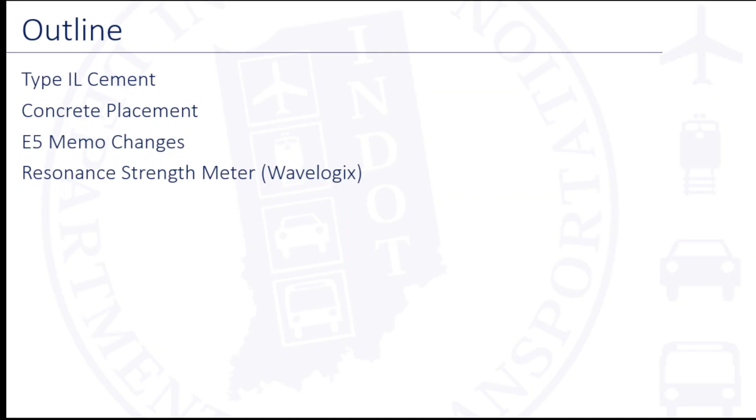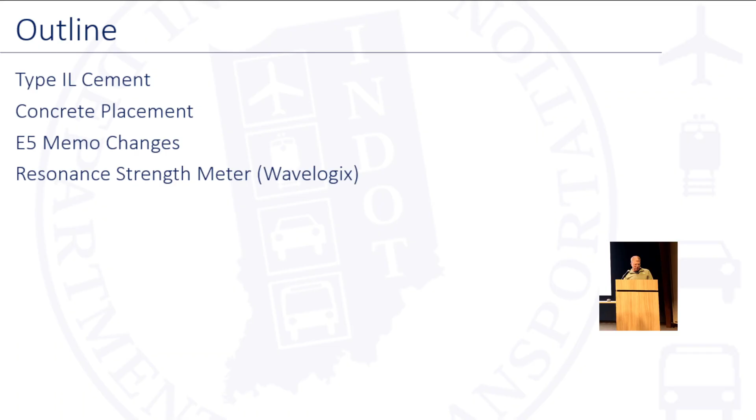Before I get started, I also want to mention that we do have some new folks in the office in my section at M&T. Those of you who don't know, Rick Harris was with us a long time. He passed away late '24. And we now have Elena Cruz, she handles a lot of the approved list items. Joe Romanek, he's handling the precast certified programs. And we have Brian Wathen, who was formerly the materials engineer in Seymour District. And then we have, I call him Doctor, he's not here, Dr. Abul Mazumder, who's handling a lot of the in-house research we're doing. I'm sure Rick is smiling somewhere and just laughing, saying it took 3 engineers to replace him. So if you know Rick, I think that's fair.

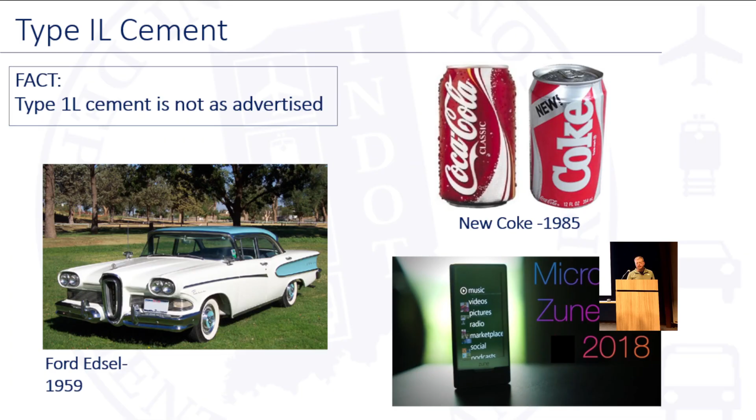So, 1L cement. I'm a customer at this point. Not really trying to be mean here, but this is kind of how I feel. There's been some marketing things in the past, some notorious ones, I guess. I was around for the Coke and the Zune. Don't really remember the Edsel, but you see where I'm going. The things are not as they were advertised, and I'm not particularly just being mean with this.

The reality is it's being said out loud: if things didn't work out, maybe the first thing you do is change the marketing. On the left, you can see what was being said in '21, and this isn't just me talking. They know that, say, perhaps it was a misstep. It was all type 1L cement was marketed as 1-to-1. It is not 1-to-1. That is being said out loud now. NRMCA in '21 was saying it was 1-to-1. Now there's very carefully qualified language saying not so fast.

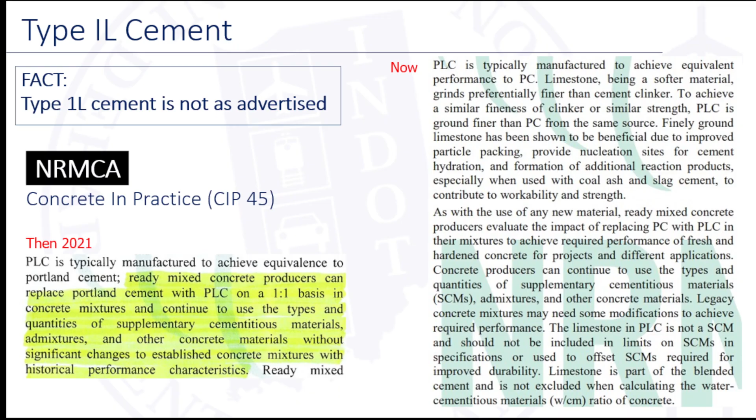Last year, ACI's Concrete International Magazine published an article stating that while early promotional materials touted PLC as a one-for-one replacement for OPC, field observations and subsequent work have indicated that the changeover is not that simple. For example, additional limestone in PLC can impact admixture effectiveness. These are things we've been chasing, asserting, and suspecting, and they're just reality.

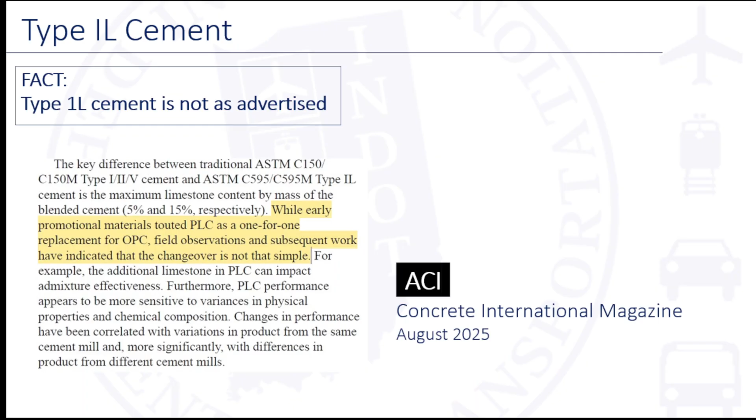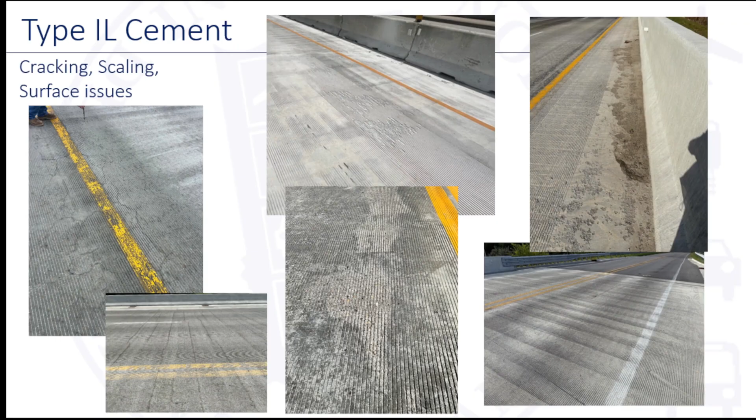And speaking of reality, this is our reality. It's happening, we're seeing issues, cracking, scaling. Maybe not every time, but we're out looking at these decks now. We've got bridge decks from around 2023-ish. There was a lot of change very quickly, and we're seeing bridge decks rated 5s and 6s, quite a few of them, in decks that are only a couple years old. There's at least one 4 I'm aware of, and that's just not acceptable.

Now when this 1L came along, we also started machine grooving decks. Those two things kind of happened at the same time. The bottom left and bottom right pictures probably have more to do with the transition to grooving, in that grooving doesn't hide anything. When we tined decks in the past, there was perhaps some forgiveness in the texturing. But when you groove it, it's got to be about tabletop level to get even grooves, and when the pans go back and forth, you inevitably get ridges.

And in the bottom right, when the snowplows go over, they clip those ridges off. So there's some things out there being called scaling that are really, I would say, scraping, which is a different phenomenon, and that's part of this. When everybody's looking at decks, there's a lot of different phenomena in play, and it's a little hard to sort out everything that's going on.

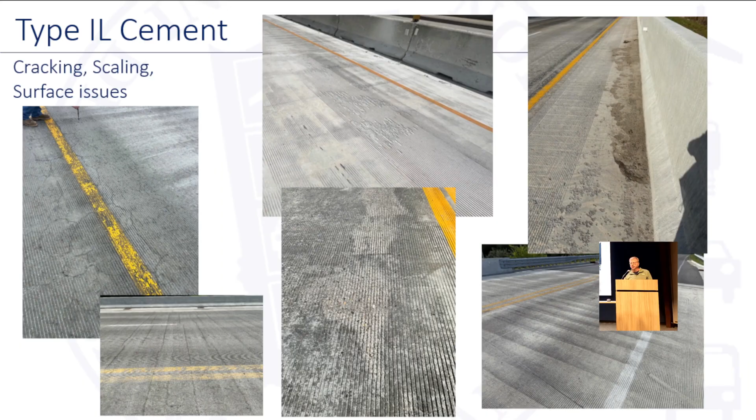Well, too much. So one thing that's going on, and it's taken a little time to sort this out, is the idea that admixture incompatibilities are happening. Some people take offense at the term, honestly. To me, incompatibility simply means it's not doing what I expected it to do. That's my version of it. Maybe the chemists have a different version.

But it's a fact that admixtures always needed to be more customized to the cements they're being used with. The chemical companies would rather sell one-size-fits-all in a region. So the admixtures, especially the water reducing admixtures, were perhaps in recent history never dialed in the way they should have been, but they were good enough. There was a lot of experience with them, people knew how to use them, and made it work.

There was a lot of change very quickly when the chemistries of 1Ls changed. The reality is there wasn't a lot of communication between the admixture companies and the cement manufacturers. So things happened, we've seen a lot happen, but now we're finally seeing it under the microscope. What you're looking at there is what we're calling air clustering.

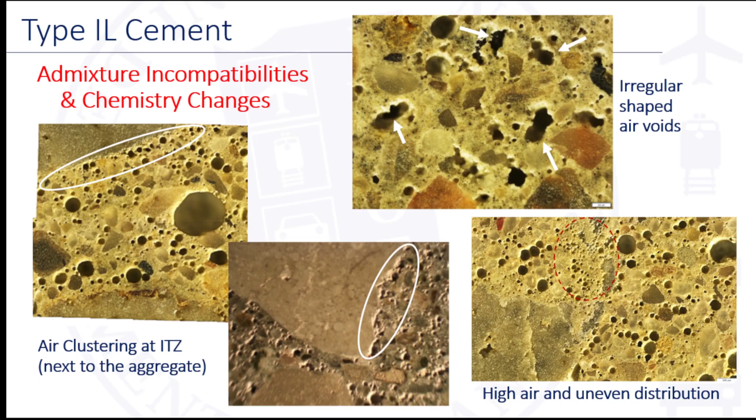We've seen hardened air content that's actually higher, which is unusual, meaning some of this air is being gained, maybe after it's tested. But there's air gain, and then the top one is even more interesting: those air voids should be spherical, but more and more with the 1L cements, they're seeing irregularly shaped air voids. The hypothesis is these are not single air voids. What's happening is multiple spherical bubbles are conglomerating together, so one irregular void might be 4, 5, 10 smaller bubbles jammed together, and that shouldn't be happening.

So the bottom line is, if folks are still seeing low strengths or slow strengths, let us know. We still need to gather data to figure out more about what's actually happening. And as always, include the mix design if you've got it.

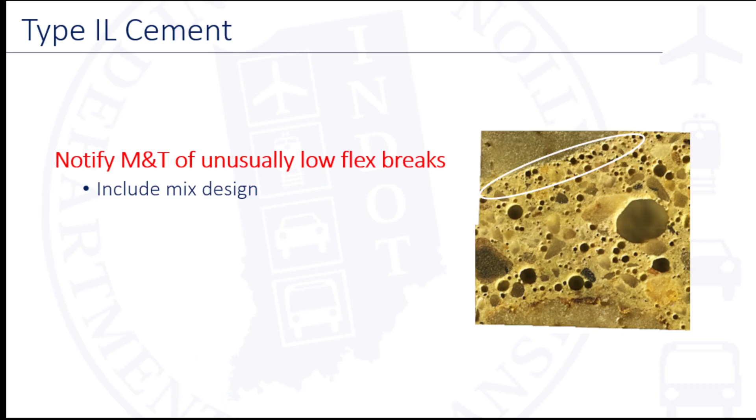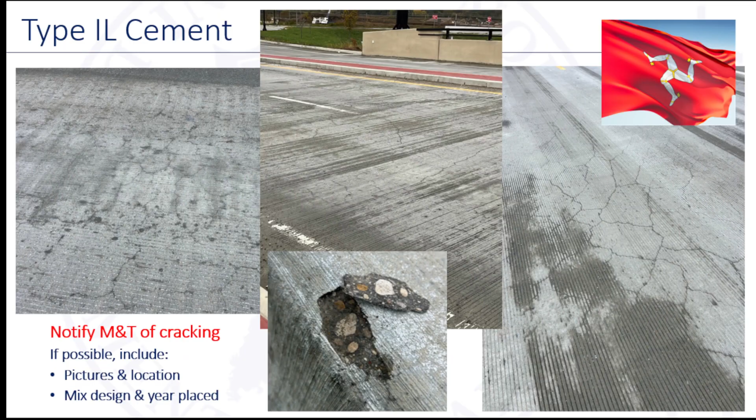That's not normal. So the ask is going to be: look at the decks. I will qualify here, a lot of what I'm talking about is bridge decks right now. We're seeing less of this in pavements at this point, but I think there's a lot of variables at play.

So anyway, these are some of the things we're seeing, and it's certainly not what we want to see. If you're seeing these things as you go out and look at decks, if you looked at them last year and thought maybe you'd see something, please go out and look again. We are trying to do our best to go out and look, but send pictures that represent the whole thing, and the mix design and years placed, all that information is good to have.

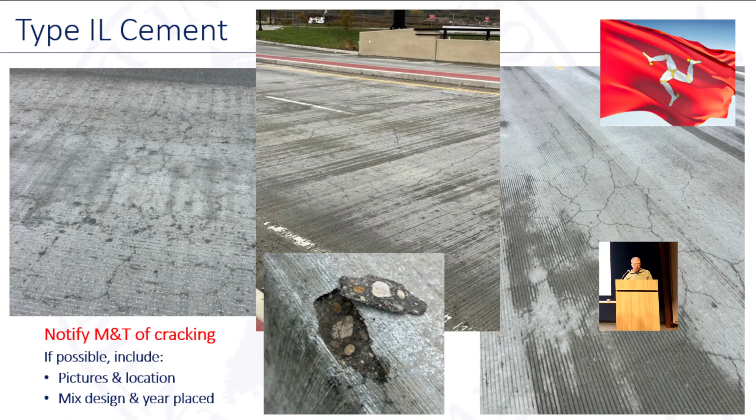So one thing we have done is Indiana, or INDOT, did cap the limestone percentage at 10%. ASTM allows 15%.

Look, the industry, they've said it themselves, I'm not picking on them, they're capitalists, it's more profitable to put more dust in there. So that's where they were headed. Some had kind of gravitated more back towards 10%, others were going higher, but we've capped it at 10%.

It was based on what we knew last year, and this really started happening early last year. Based on what we knew, it was a lever to pull. It's a step in the right direction. Is it going to solve everything? No, it is not. There are a lot of variables at play, a lot of chemistries, a lot of things with the manufacturing itself, but limiting the limestone dust is very likely going to help the problem.

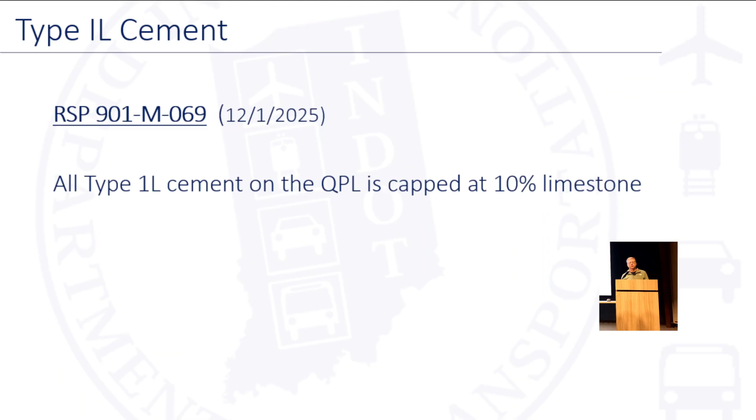So we are the only state in the country to have done that. It has not been without a bit of a challenge, we'll say, but that is in place. So any limestone cements, PLCs, you get off of our approved list as of now are going to be capped at 10%.

Concrete placement. I'm not picking on anybody here, and the intent is not to say no one got out of bed in my career and said I'm going to go do a bad job. I've grown up in this as well, and learned some things. The reality is 1L has highlighted some of the problems that are out there that we could have always been doing better. It's just there's a much narrower window for success with 1L. I don't think that's any secret for people out there working with it.

So everything's got to be better. The reality is there were some things we probably could have been doing better all along, but now we know.

The other thing that's happening is that the 1L problems, whether finishing or wherever they are, these are compounding on top of those other things. The bleed rates tend to be slower. There's a lot more fineness in those cements, and more fineness means more surface area, so the bleed water comes up more slowly. That changes the timing for the finishers, creates challenges if they're not on top of it, and changes the timing for the admixtures. These mixes are just less tolerant of water in general on the surface.

And as I mentioned before, with machine grooving, finishing's got to be better and flatter in order to get a good grooving job.

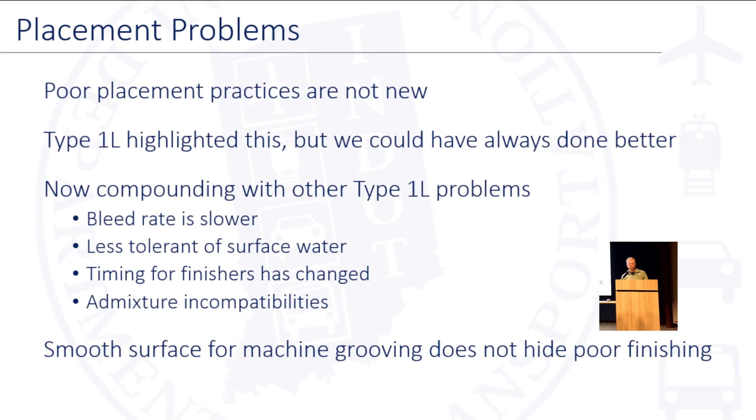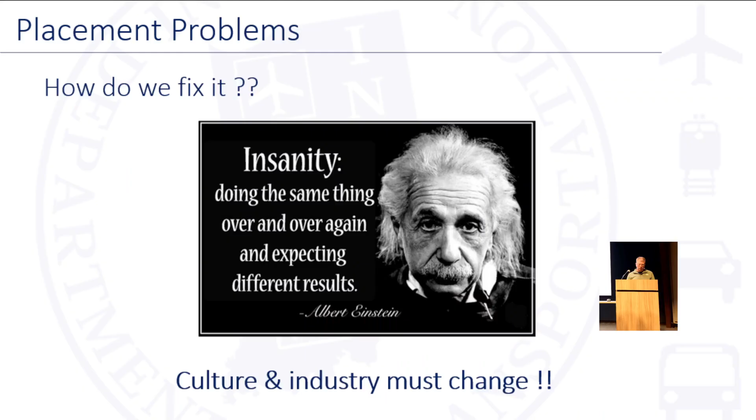So what else are we going to do to fix it? As has been said before, insanity is doing the same thing and expecting something different. Culture and industry has got to change. There's some cultural things at INDOT that need to change in the way we do things, for certain. There's things I've grown up with, and I'm going to talk about a few of them, but we can do better all the way around, and that's what 1L has really shown us, I believe. We're learning, and some of the things I'm going to share with you are a few of the things we think we need to fix, for sure.

There is a draft spec that was shared with industry back in December. It's still up for discussion, I guess. But one of the big things, and I say now I'm from the 1900s, I'm feeling like an old dog, but...

They're 658 pound mixes. Not going to pick on the aggregate guys too much, but most of the 8s that we use with our concrete aggregate are gap graded for various reasons. So we're just saying use an 8, use 658 pounds of cement, it'll be all right. It really never was a good recipe, but we got away with it, I guess, for years with type 1 cement.

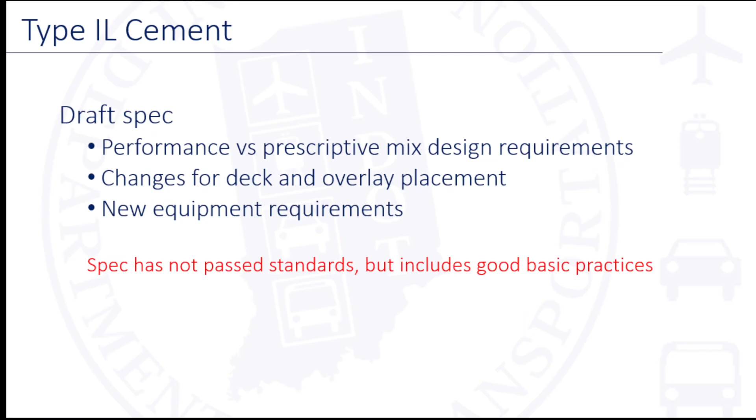One thing that I know INDOT has allowed, we've stood there and watched, and it's not everywhere, it's not every time, but there were a few contractors who were perhaps notorious for this: steel floats and steel trowels should never be used on exterior air-entrained concrete. They should have never been used on our bridge decks, but apparently some contractors, for one reason or another, used them. Our folks were not trained to look for it and pay attention to it, and we didn't really know the why. 25 years ago, no one ever told me why you shouldn't use steel.

It shouldn't have taken this long for us to figure this out. Again, not everybody is doing it, but the issue is that it might slick up the surface, or glide over the surface and make it smoother. The bad news is it traps the bleed water in that still needs to come out. And if you seal that surface up too tight before the bleed water finds its way out, it's going to scale. It can also do things with the air void system, line up bubbles, and create delaminations. Steel is used commonly in interior concretes, warehouse floors and such, where they aren't air entrained. It's not a problem there.

They always hard trowel and steel trowel warehouse floors, but that's not appropriate for bridge decks. I'm told that a lot of what happens is folks come out of a union hall, they're taught some things, but they aren't told whether they're going to an exterior bridge or a commercial warehouse. They show up with steel tools, and if the contractor doesn't know, nobody tells them not to use that. I think there's some cultural things here. There's one contractor I'm fully aware of that just believed in it and used the steel. All I can assume is we could have done better all along. Type 1 was forgiving enough that they got away with it, but we should have never really been doing it.

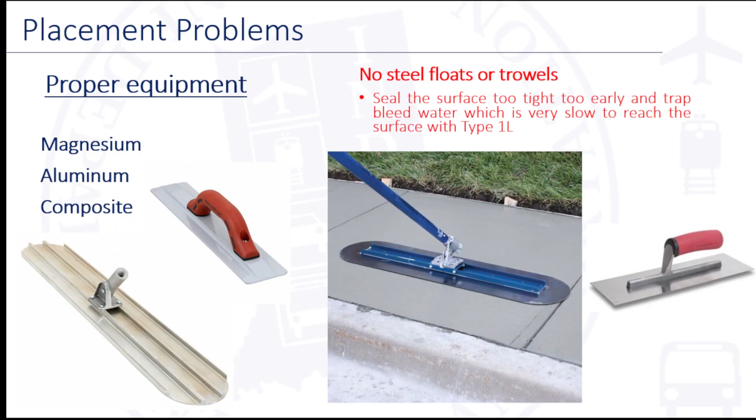Screed changes. A few things have come to light. The 1L mixes have certainly behaved differently behind the screeds. Even the E5 mixes before the 1L came along behaved differently. But I think it's come to revelation that we're over-vibrating the surfaces too much. The Bidwells typically have a vibratory unit on there that I'm going to start saying we need to shut off. You don't need to remove it, just don't use it. When you're in the Gomacos, if you still have one of those older machines, they don't have it on there, I don't believe. So there's enough surface vibration from the drums, the rollers, and the augers. We don't need more on the surface.

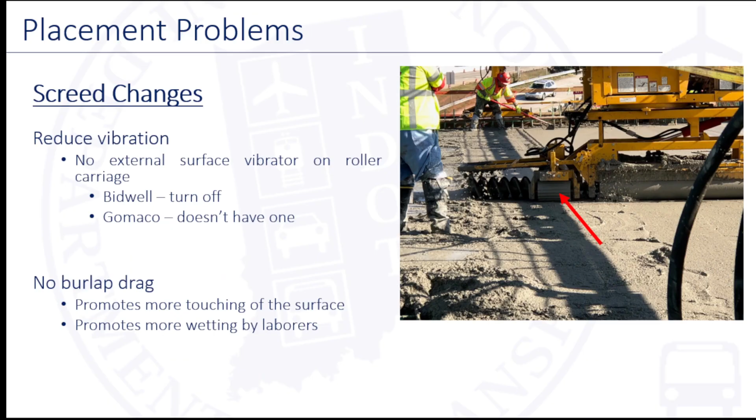The burlap drag promotes more touching of the surface, and it also inevitably promotes somebody wanting to stand off to the side and spray water on it every time it comes across. So you don't need more water on the surface, it's not helping. I don't really think we need the burlap at all anymore.

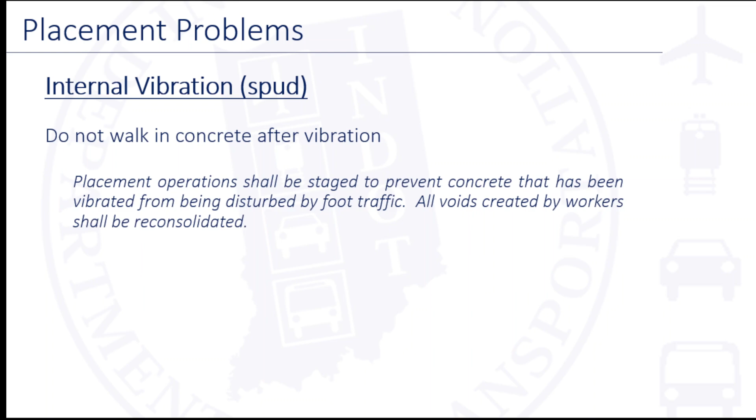This is something that, honestly, talk about culture, I grew up in it. I'd never seen this done any other way until we started looking outside ourselves, and Kansas specifically puts this in their spec: when whoever the labor is with the spud vibrator, the mud hits the deck, the pump pumps it out there, the first thing the guy with the spud vibrator does is walk around and vibrate it, and then everyone else steps forward with the lutes and starts doing their job, but they're stepping in it after it's been vibrated. It's been said, look, if you're stepping in it after it's been vibrated, it's no longer vibrated. You've got a footprint, you've got voids, and now it's unconsolidated again. So pay attention to that type of thing. I honestly, when I read that and someone brought it to my attention, I can say I've never seen a bridge deck done where this has honestly been followed.

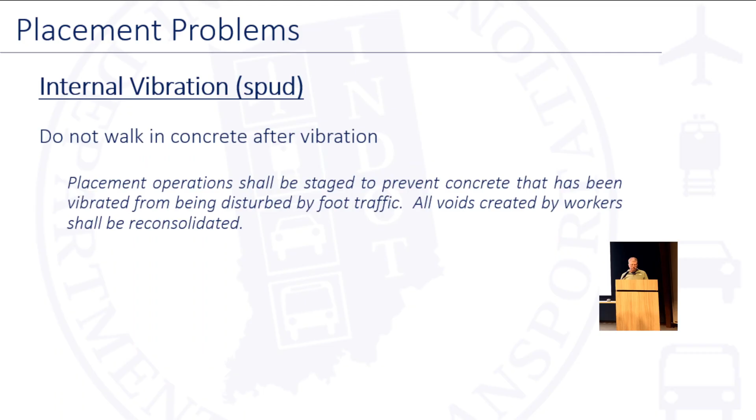I wasn't taught that, and I don't think it's just not in our culture to do it. So how do we get around it? You've got to pay attention to it. The way the Kansas spec calls it out is using gang vibrators. There's a much tighter operation to the screed - some of them, I've got more pictures here - but some of them vibrate it, and then the guys with the lutes or the laborers are behind it, so they're reaching over, and it's just a much tighter operation to keep from inevitably walking through it.

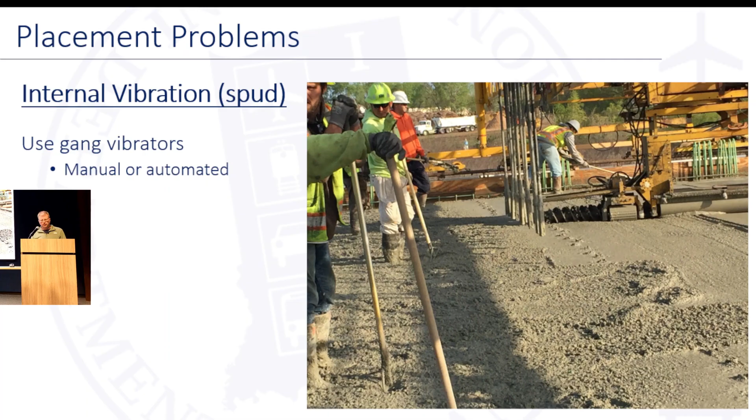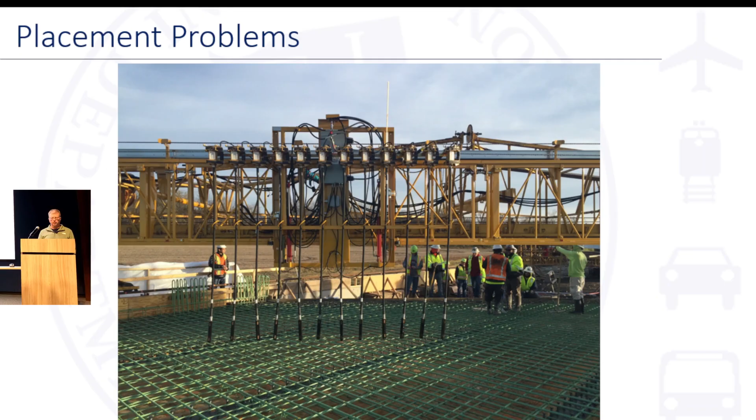Now this is one where a contractor got sophisticated, and I'm not expecting this, I'm just showing an example of maybe where it could go. They got completely automated here with a gang of vibrators that lower down, and you're getting uniform and consistent vibration throughout with this. You can see how tight that is. I don't think I've ever been on a pour that looked that tight. It's going to help. There's a lot of other things going on, but this is certainly something that can help.

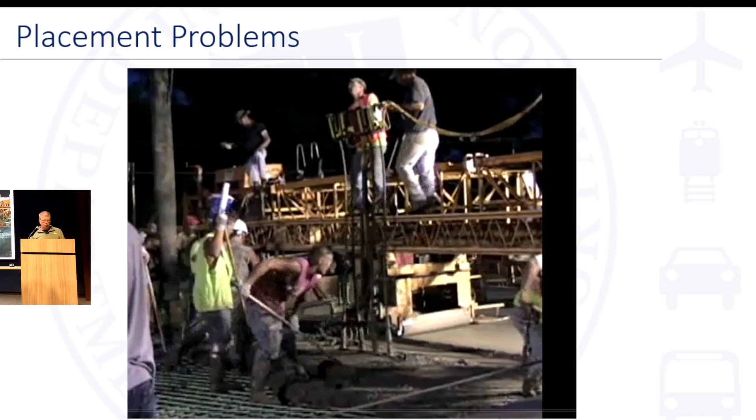Maybe the more low-tech way to do it would be with a walk bridge and manually, 3 vibrators, lowering those down again, so the laborer's not stepping in it. This one, they got one individual up on a walk bridge with a counterbalance, lowering 3 or 4 of them down, but the problem is the laborers are in front of it and between it, so they've got the timing worked out.

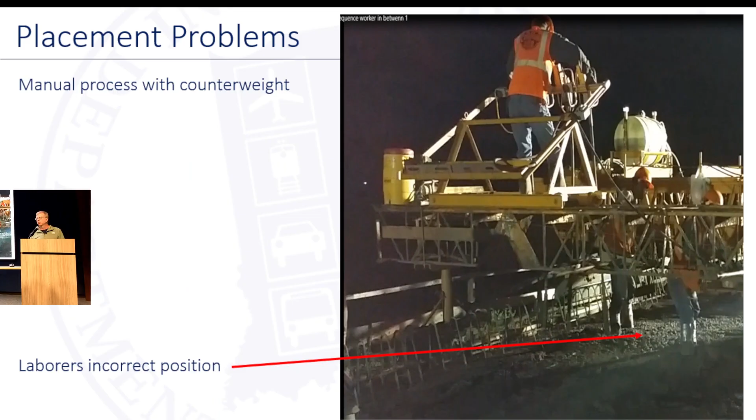But anyway, I'm not really asking for the most sophisticated approach. We need to try - it's one thing that's been brought up that we can do better. Let's just try to do better with that.

Leveling - now this is something that actually does have language in the current specification, but it's something that INDOT really has not enforced. I think maybe 30 years ago this was done more, but we've gotten out of the habit. It was coming to light even before, more with the machine grooving bringing to light that we needed to do better with the trueness and smoothness behind the screeds.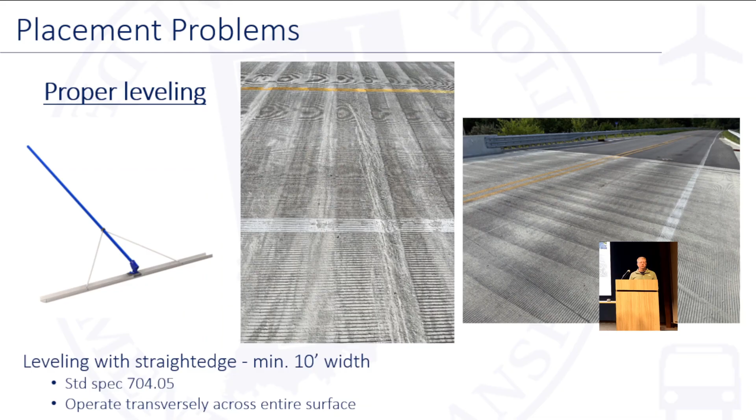And in order to achieve that, we need to do more leveling. The paving folks do this all day, every day. They got to get flatness, and they've got a 16-foot straight edge out there checking it all the time. We don't really do that as much on our bridge decks now. So we need to start.

There is language in 704.05 that says lay the straight edge out there and check it. What we need to do is check it all the way across. If there's low spots, fill them in, and if there's high spots, you're going to clip them off. Like I say, that language is actually already in the spec to some extent.

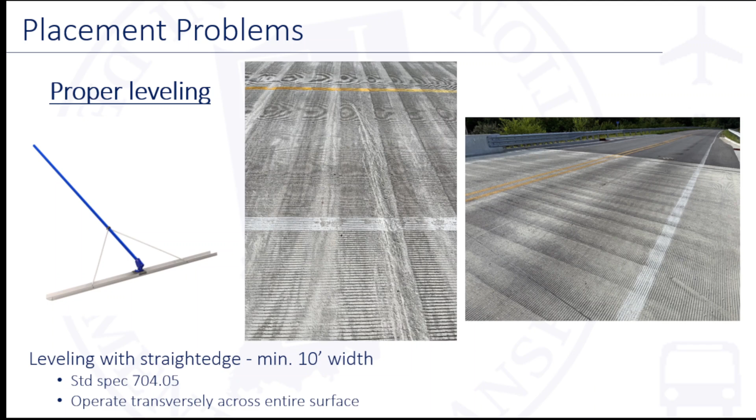Now, likewise with the bull floats, all these operations, we don't want to be over-touching the surface. There's a certain amount of things you've got to do, but if the mix is proper, it should just be 1 or 2 passes. It's not keep running that thing across there and overworking the surface by any means.

The one issue certainly on bridges, especially phased bridges, is whether it be the straight edge or the float, you're going to have a long handle that's going to go somewhere. Is it going to be sticking out in an adjacent lane? How do you deal with it? We got to figure out how to deal with it. There are other types of tools maybe used more in the commercial side, warehouse floors, but we've got to figure it out because this is what we need to be doing to ensure we get a smoother, flatter deck.

And then like I said, no burlap. So we get rid of the burlap and at the very end of the line do this light texturing, no different than we would do on a sidewalk or something like that. You don't want to pull or dislodge the aggregate, but it's just a very light broom for a bit of texture.

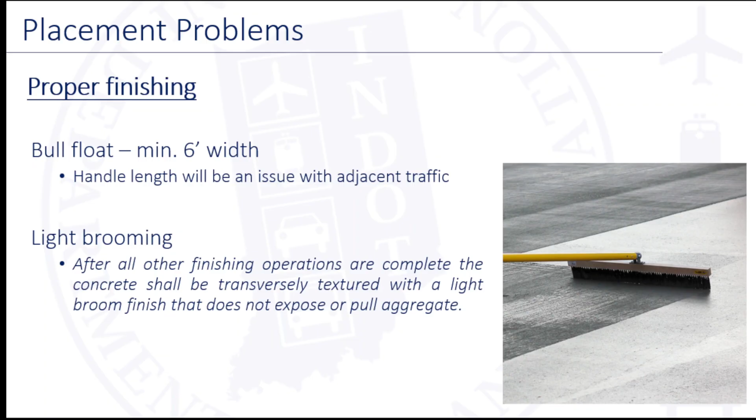Now this is going to be the tricky part. See if I can get out and get to the video.

No water applied to the surface for any reason. There is an approved list with a few true finishing aids on there. They're all colloidal silica based. We're going to use them in as-packaged condition. Dayton is one of the products. It comes in a dilutable packaging where you can dilute it, or a green bucket where you use it as packaged. The only thing we're going to allow is the stuff that's as packaged.

I don't want contractors out there figuring out, well, I can stretch it a little further, use a little more water. We're not going to mix it on site. So all those products on the list are prepackaged - use them as is, and you can rub them on. They're not going to be detrimental like the old evaporation retarders that were 90% water, and finishers thought they were doing better when they used that. Well, all they were really doing was rubbing water into the surface if you rubbed on it.

You had to spray those and leave them alone, but I've seen more than one survey from other states go around, and everybody says the same thing.

Yeah, they work, but no one uses them right. And absolutely, we don't need pressure washers. They put out way too much water. It's just a candidate for abuse. People are inevitably going to spray the surface, and we've got to get away from that. Not every contractor uses them, but there's a few that do. And we can't have this, whether they're spraying the mat or actually spraying the deck.

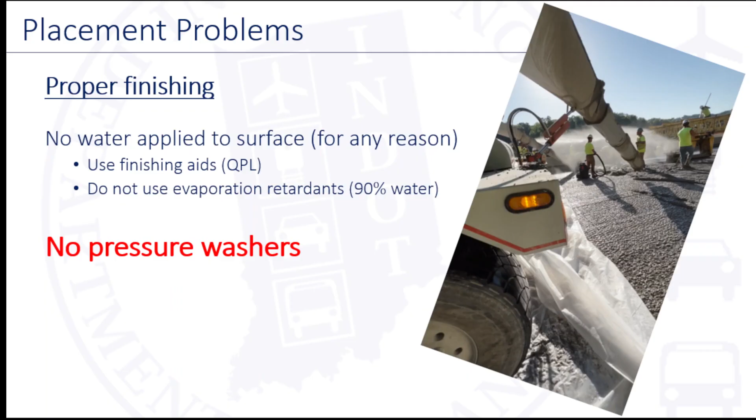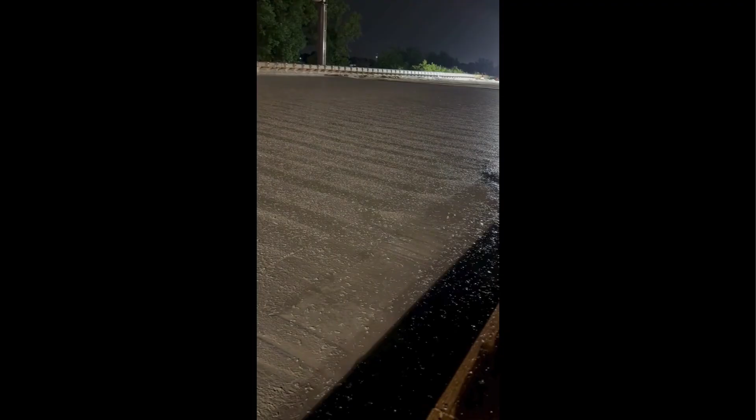It's too much water. So I'm going to try to get down here to these videos. This is a different video than what I was talking about with pushing water, but this is one of those things that never happens until a video shows up, and it did happen. So this was a deck. It was raining, and the contractor got caught and decided to solve the problem by squeegeeing out the water.

Inevitably, we've seen a fair amount of scaling in the gutter lines. This obviously should not happen, but it did. Don't let this happen. But with the gutter lines, water curing or whatever, inevitably with 1Ls, the more water laying in those gutter lines early on, the 1L just won't tolerate it.

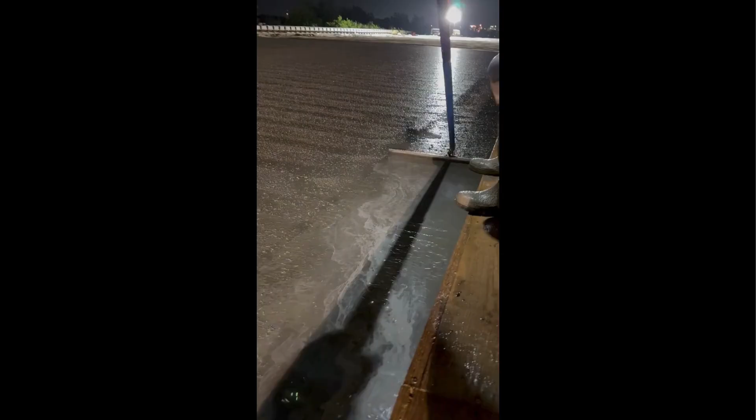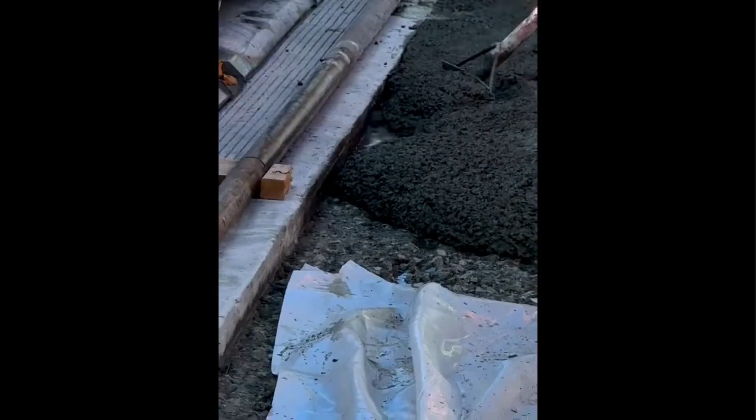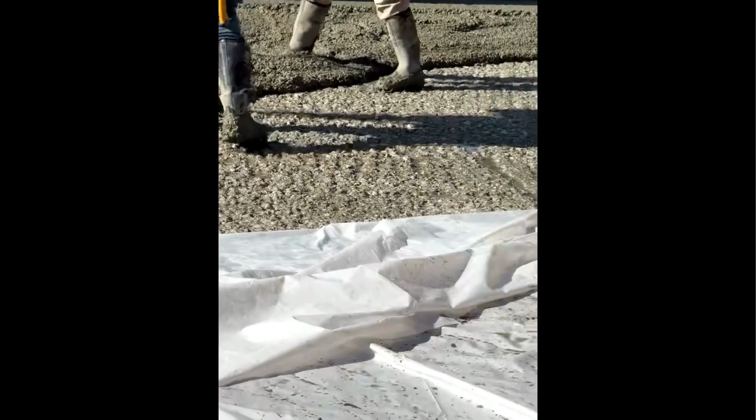The other video, if she can get to it, is showing an overlay, and it's showing them pushing the water out of the way, displacing water. On an overlay hydro demo, you've got to keep the surface wet, but you've got to watch the low spots. That's going to be too much water for the 1L, and you're going to hurt the water cement ratio. Those low spots have just got to be blown out.

We've all seen this done, and again, I talk about culture and teaching people to do things differently. We're just going to have to do things differently with 1L. It just doesn't tolerate it. It was probably never great, but inevitably we've got to stop doing certain things we've just seen done forever. I just said all that - water, don't do those things.

In the end, everybody's walking around with a phone in their pocket. A little bit of video goes a long way to answer a lot of questions and actually end a lot of arguments, for lack of a better word. It ends a lot of debate over what happened. We can spend thousands of dollars at Purdue sometimes, run out and take cores and look for difficult answers and try to guess what happened. And sometimes the simple answer was, yeah, nobody mentioned there was rain.

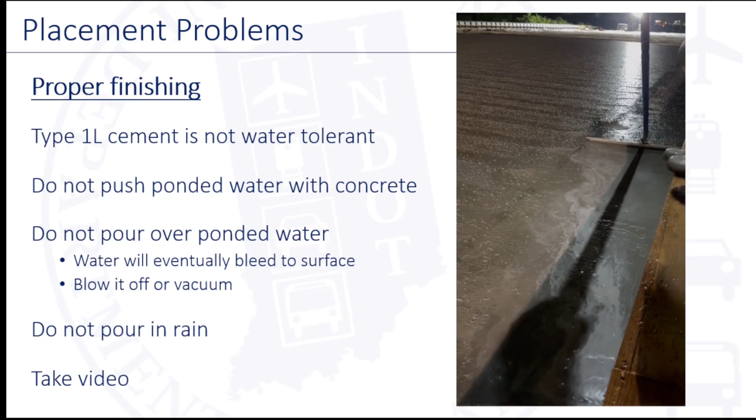So curing - the timing for applying the water curing, I do believe, is different with the 1Ls. You can't get on them as quick. One of the things I was going to take out was the language about the 60-minute window. When you get those hoses turned on, putting the burlap on, it's got to be well drained. You can't be dripping water.

I've been in rooms with presentations by other folks, and they'll do the old paint brush and splattering water trick, and they'll tell you that if you get that water droplet, you're going to see where you've weakened the water cement ratio, and you'll see it. You certainly can't be out there with dripping water off of burlap and all that. You've got to have well-drained burlap, get it on quickly, but you don't want to get the hoses on there too early.

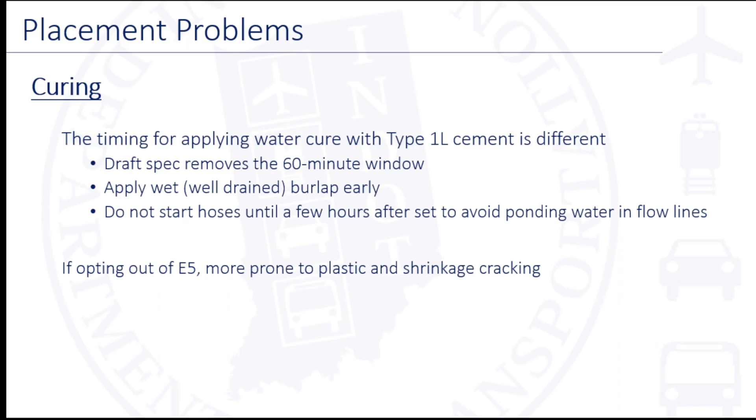I think, especially on the overlays where we have been water curing over the past few years, you get the water in there - our bridges don't have drains in the shoulders anymore, so the water's got to run off the end. If you get the hoses running, and now you get too much water laying in the gutter line somewhere, if there's a duck pond, which inevitably there is...

Sometimes it's hard to get those vertical curves to drain. When that happens, some of that water, even from the curing water, is just going to lay there in the gutter lines under the plastic, and I think that's not good either. So it needs a little more time before you start applying curing if you're going to go that way on a deck. We never stopped water curing the overlays.

If opting out of E5, people have theories on things. Some want to stop using the E5 as much as they have in the past, due to theories about 1L and what's causing some of our trouble. But just know there's a fair amount of forgiveness that comes with the E5.

It does hold the water in, it doesn't leave. So there's the potential for experiencing more shrinkage cracking with a lot of other things going on, and the fineness of the 1L.

So one thing, when you take the E5 out, you've got to put the other pozzolan in. So you take E5 out and you put in 30% slag cement. Well, I think a lot of what's happening is you're diluting the cement, right? Now you have 30% less 1L in there. And I think that might be as much of an effect as what we're seeing as a true improvement from, in some folks' minds, of removing the E5.

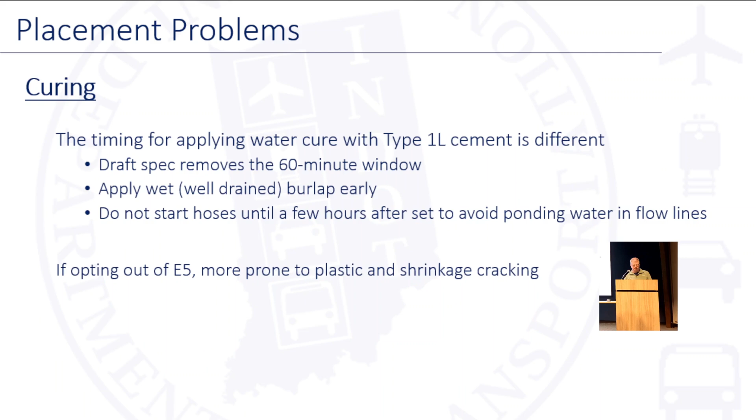Along the lines of E5, I don't have anything to change yet, other than because I don't know where the spec's going to shake out. There's some things in the spec that's still being discussed, and I'm probably going to take out there's a line in there that says no excessive vibration. I'm going to probably take that out as far as the spud vibration goes and leave that more to the contractors. But other than that, I still need to have more clarity on where we're going with the memo.

It's just, the reality is E5 never was built to fix certain things. Maybe they shot themselves in the foot a little bit, honestly, because I think people believed it was a silver bullet for a lot of things. It does do a lot of favorable things, holds the water in and makes for a better placement, and a lot of things out there in the real world.

It's not going to fix fundamentally bad practices. It's not going to fix a bad mix design, which again, INDOT gap graded mixes aren't necessarily ideal, and those admixture compatibility things that could be going on under the hood with the water reducers and other things, it's not going to fix those.

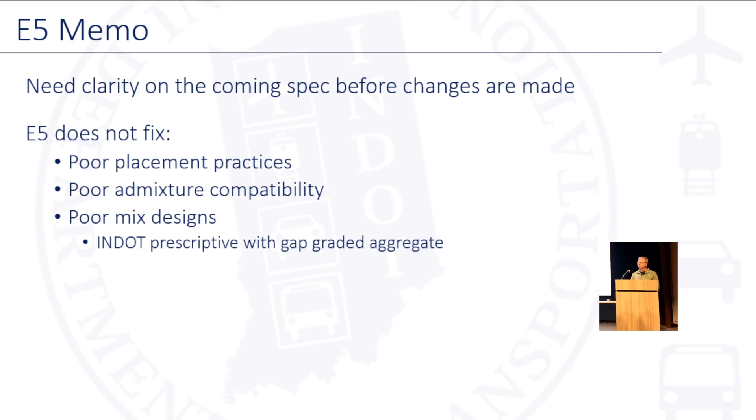Lastly, the resonance meter that I've been talking about, we started developing this thing in 2017, and there's been a lot of research. COVID happened, so there's been, seems like, starts and stops with it. For those of you who don't know what this is, it's a sensor developed through JTRP research projects and Dr. Luna Lu at Purdue. It's her company, WaveLogix, but they're now marketing this product.

It determines in-place compressive strength, independent of the mix design, and it's not like maturity where you have to do a correlation or anything like that. It's just, boom, there it is, answer. But we're going to make this more mainstream this year for the first time. We did a little bit of shadow testing last year on a couple jobs.

We're going to, likely via memo, invoke like three different USPs: one for structural, one for paving, and one for patching, and it's going to allow this as an option. We've still got to figure out some of the logistics, whether it's going to be paid by change order. I think that's the way we're going, but we've got a few things to sort out.

But you are going to see this come out fairly soon. At this point, I'm probably going to say it'll be published, I would hope, by the end of March, but it'll probably be April when we get something out there to allow this in lieu of the flexural beams. I don't think anybody's going to shed any tears if they don't have to do any testing beams. So this will hopefully allow us a better way, I guess.